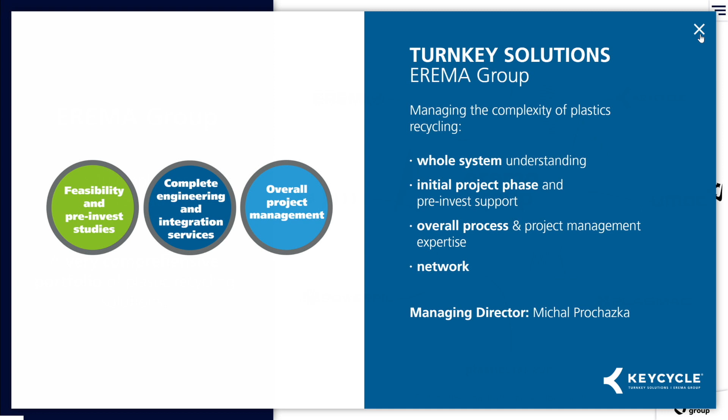Yeah, thank you. Companies like, for instance, KeyCycle. KeyCycle offers turnkey solutions, project engineering for steps ahead of the extrusion part, where you need debaling, washing, shredding. They can do the project engineering, they can do turnkey. Another company which will also be interesting to you is 3S, which is our main production company.

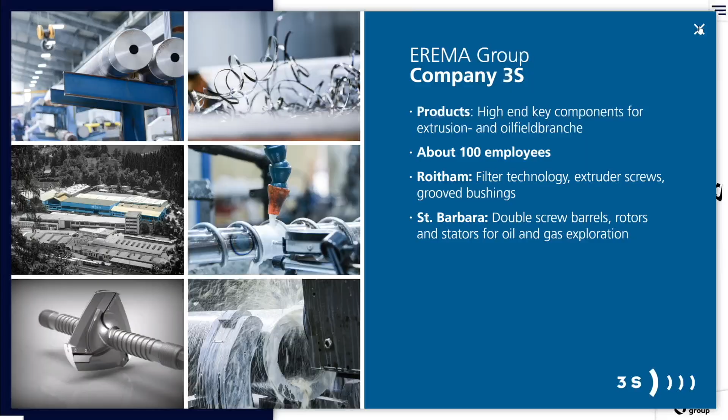So at Erema we do the assembly of the machines, but the steel works, the CNC drilling, this is all done by 3S, and they produce the core parts for the extrusion, the filter systems, the screws, and so on. Thanks, Clarence. Okay. So Erema has grown to a large group.

With this business year we'll have more than 330 million turnover, I guess, and more than 900 employees. We supply around 350 extruders per year now, so on average every day an Erema is started up somewhere in the world. Those numbers are a little bit not up to date; we now have around 8,000 lines worldwide. And we are proud that on our machines around 20 million tons of plastics are recycled every year.

The main market is Europe, because historically they started earlier with recycling. Recycling there is also driven by legislation, as we heard before lunch. Laws are being passed, and initiatives help the market to develop. North America is picking up, also Asia, but also in Africa we've placed quite a few lines, and in South Africa alone we have around 130 machines.

We also have subsidiaries around the world. Usually we work with dealers on all 5 continents, and subsidiaries are mostly in the main markets: China, US, Russia, Bangkok, but also in South Africa. We started up there, so my colleague from Erema Africa is here as well.

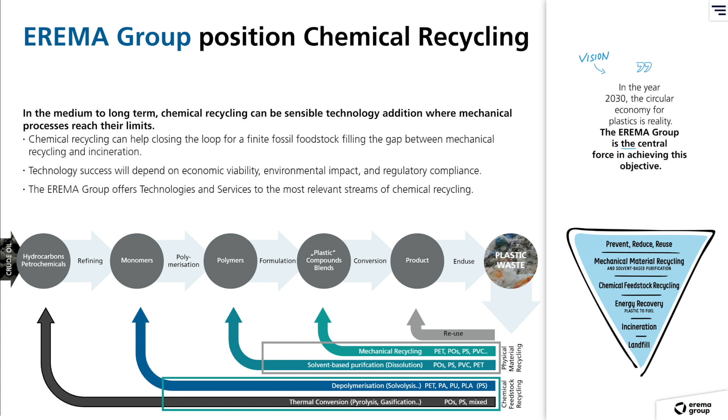Definitely not. And that's why we say, you see it on the right side here, you should follow a certain hierarchy. Of course, try to prevent or reduce plastic pollution, try to reuse as much as you can. Then go into mechanical recycling. If you have streams which are not possible to be recycled mechanically, then you can go into chemical recycling, which of course we do push and want to develop, because what we want to avoid, as you see down below, is, okay, energy recovery, but especially incineration and landfill. And that's the goal for all of us, I think.

So, if you have a look at the complete life cycle of a plastic product, from the product you go down to collecting, sorting. And then every process further on needs shredding, washing. You need to clean the material first. It doesn't matter whether you're going to mechanical recycling or chemical recycling, you need a material preparation, which is pretty much the same.

From shredding, washing, where's my, oh, there we go. From shredding, washing, you can go into mechanical recycling. This is what we do most for the moment. And then you're ready again to convert it. You can go into solvent-based recycling, which would be the second stream, or, for instance, chemical depolymerization. Now, we do participate in such projects, but there's just a few of them. They're still in the startup phase, really.

Solvent-based, we have, for instance, cooperation with another Austrian company, where we mostly concentrate on the way to prepare the material stream, to take out humidity, to flatten it out so to have no peaks. So this is without extrusion. The chemical depolymerization can include the extruding part. I have to be honest, most of those projects, actually all of them, are subject to NDA, non-disclosure agreements. I can't tell you much about it, but still, they are out there. They are pretty promising projects.

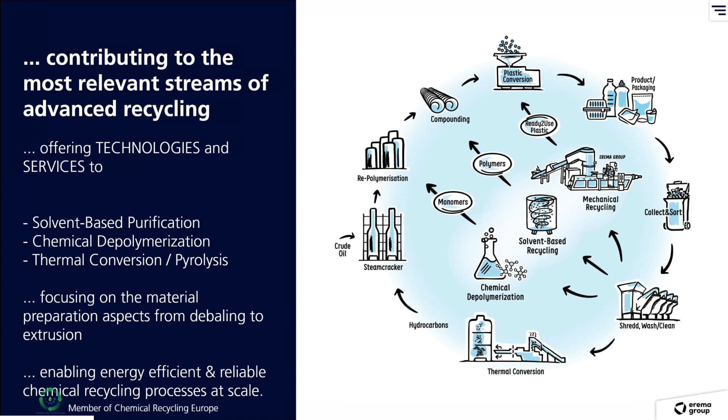What I will be talking about mostly is the latter part here, which is thermal conversion. I would say 80% of our projects within chemical recycling are going into pyrolysis, where you go through the whole chain. So, since you know our view and the possibilities you have, what can Erema offer, especially now for chemical recycling? As you see here, we have the first part, which is preparing the input stream, flattening out, taking out moisture and so on, for the further process, which is, in that case, pyrolysis.

And this is important for every recycler, be it mechanical or chemical. You also need the first part here; it has to be done well. Which is of course collecting, sorting. We were talking about this. We need more volumes, definitely. But we also need good shredding, good cleaning, good washing processes. Even chemical recyclers need to take out PVC. You don't want PVC inside, less than 1%. You have chlorine, you have sulfur, all those things which you don't want later on in a petrochemical process. So they need material preparation as good as it gets, just like mechanical recyclers do.

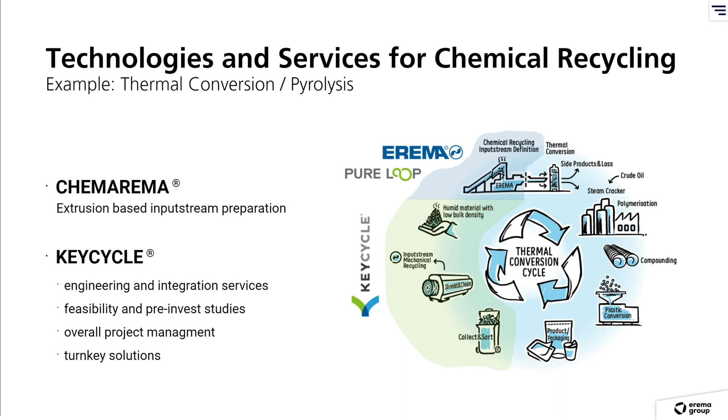And here we offer, let's say, the technologies, the Erema. I will talk about this in more detail. And then we have, again, our company, KeyCycle, who can assist and help out with turnkey, with project engineering. So they can help out with those questions like, how do you sort it, how do you shred it, how do you wash it? How to prepare it for the next step.

All right, so why does it need an extruder at all for chemical recycling? I've talked to people and many are like, chemical recycling, hey, just take the waste as it is and put it in somewhere and then dissolve it and that's it. Well, unfortunately not. It's not like this. It's not that easy. You need, as I said, you need to prepare the material first.

You need shredding, washing, and even that is not enough because, as you see here also, after you get, let's say, the material, be it from the truck, mostly you get it in bales, of course. But you see here, in the animation, that this stuff, after it's being washed and shredded, it's still rather fluffy. So you have high volumes, almost no weight.

So of course, one possibility would be you feed it in directly into the reactor, cold feeding. But after all, you need some steps. You have to solve some problems. I mean, you will have some issues because you want your waste to be oxygen free. You want to heat it up quickly, to make it scalable. So the problems we see here, if you do a cold feeding into the reactor directly.

So first thing would be, what do you do with the fluffy waste? So you need to somehow compact it first. Then you want it oxygen free. You don't want later in your process the whole thing to blow up. So you need to take out oxygen. You could, with a lot of effort, do even that. Add some inert gas, nitrogen, for instance. But then again, it's a matter of costs and effort and energy.

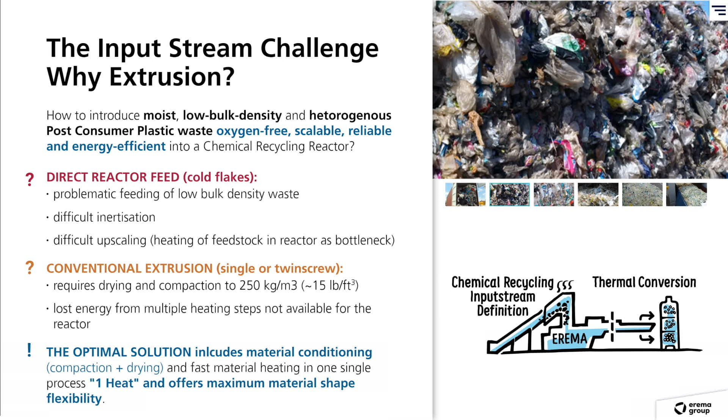So here, as you see in the bottom part, the optimal solution really would be to use the preconditioning unit where we heat up the material quickly, then put it into the extruder with our countercurrent system and solve all those problems with humidity, with different material streams, all in one step. So what does it look like?

So this is the Erema. We call it the Erema principle. This is the preconditioning unit I was talking about. So you see the material coming in. You have the single screw extruder, and we transfer then the hot melt via melt pipe to, in that case, a chemical reactor,

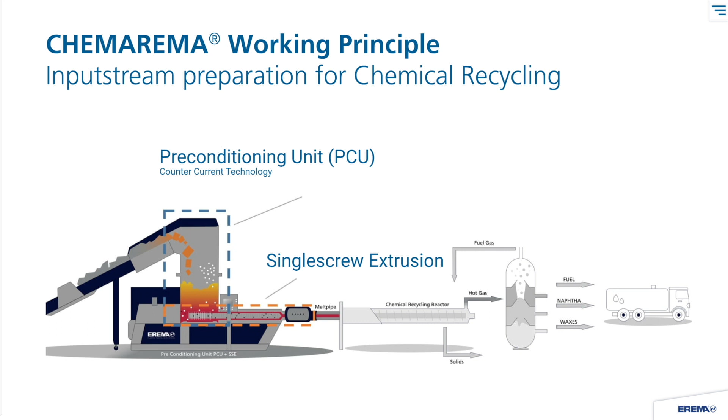a pyrolysis reactor, from which the fuels are then transported into a distillation column, where you fractionize the oils into different streams, like short-chained fuel, naphtha in between, or waxes, which you would then sell to petrochemical refineries, for instance.

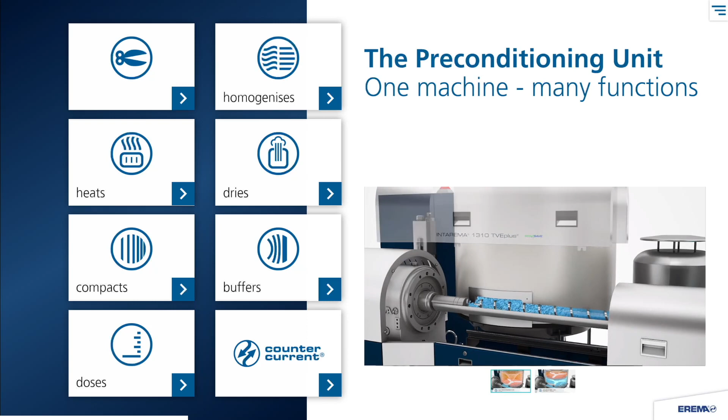So again, what does the heart of our line do, the cutter compactor? It's a disc with knives where the material comes in. Can be rigid material, can be flexible packaging, film material. In case of films, we cut the material down, we homogenize it. There's no hot air inside. Because of friction, we heat it up, then we dry it, of course.

Due to the higher temperature, it starts compacting, and we can use this buffer to add some dosing to it. There are projects where you need additives, you need something to increase reaction time, and that's where you would work with this. And the way we feed it is by what we call the countercurrent principle.

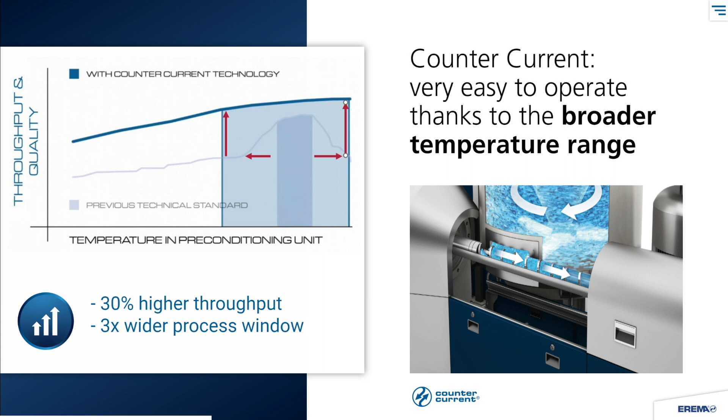So we feed the material against the screw direction, which means that we fill up the screw as much as we can. That's very important because it's a stable process, and as you see on the chart, we have a much broader temperature window. Why is this important for chemical recyclers? Because we can work with a higher temperature within the cutter compactor, which means we feed into the extruder almost at melt phase.

Why is this important again? It's a matter of wear. Because in all those streams, you have a lot of abrasive materials. You have sand, you have stones, whatever. That causes wear on your extruder. But if you heat the material up so much that it almost immediately melts once it enters the extruder, all those abrasive particles start floating in the melt. And that already helps you reduce wear.

If you have a conventional system where you take the material as it is, agglomerate it, put it into a twin screw extruder, until it reaches melt temperature you have a section of the screw where solid particles are rubbing off at your screw tips, your barrels, and so on. So the wear is just immense. So this is also a wear-optimized machine.

So summing it up, this is the basic setup. We have the preconditioning unit, so we can add whatever it is: films, agglomerates, flakes. We are very flexible regarding the input material and bulk weight. We reduce moisture from 8%, we dry it down. We have the countercurrent technology, which is unique, feeding the material against the screw direction and filling it up.

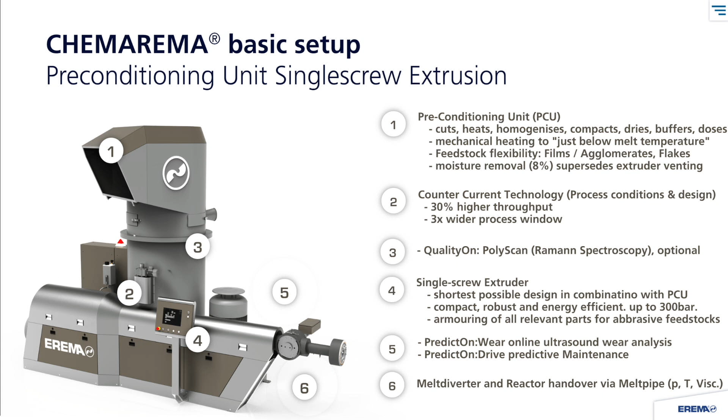We have the single screw extruder and the melt diverter. Here we also help our customers define it. If we know the viscosities and how the material is composed, we can calculate the dimensions and help the customer install the melt pipe the best way, how long it should be, and how the melt diverter should look. So here we also have know-how.

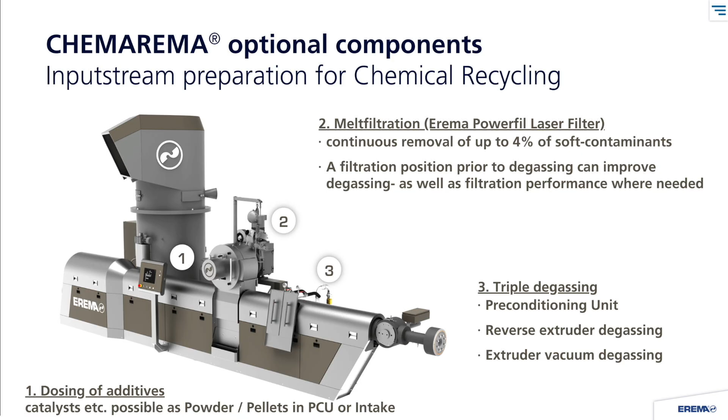What you see here now, I just put it in the slide. This would be, let's say, the perfect solution for mechanical recycling for post-consumer, where you have filtration in the middle and degassing. For chemical recycling, we do not usually offer such machines. However, there are projects where you might need some dosing additionally, where you might need some good degassing. So also this we could offer as part of the scope of supply if it's needed. But in most cases, we have the short screw without filtration.

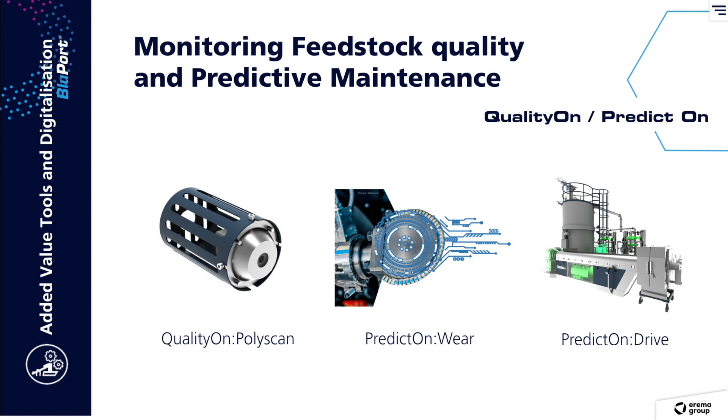So these are the neat devices I already mentioned. So you have, for instance, the QualityOn:Polyscan. What is it about? It's a laser, so it's a Raman spectrometry based on the Raman technology, and basically it detects within the cutter compactor your material composition. Why is this important?

Again, you want to know, do you have a lot of PVC inside? Also, usually chemical recyclers say we need PE, PP, maybe some PS, polystyrol. But then you detect some other things like polyamide, like PET. This is what they don't want in their process, because PET will bring in oxygen, polyamide will bring in nitrogen. And you can detect this.

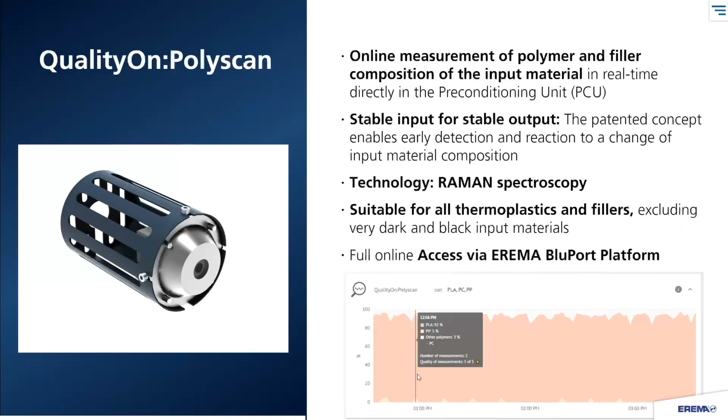Let's say it's maybe not that accurate, because it will give you a trend. And if you have, let's say, issues at your reactor, you can look back and check. Oh, I know why, because at that time I had some additional material streams which I did not want. And you can, of course, take them out via a valve. So this is another device which can help you to reduce problems later on in the process.

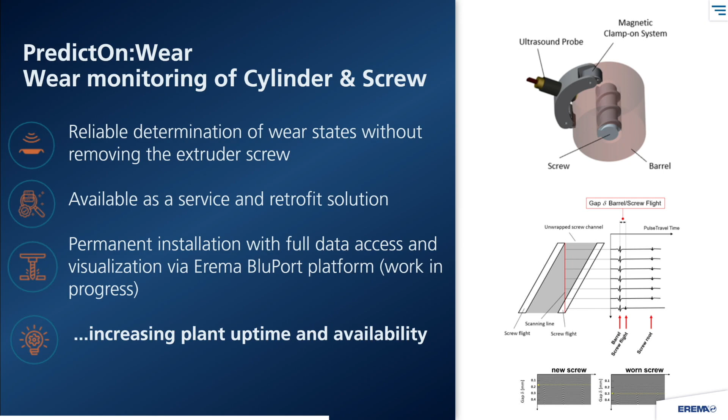Also, we have PredictOn:Wear and PredictOn:Drive. So we are the first company, I guess, in our industry who introduced predictive maintenance, let's call it. So what you see here, this ultrasound going through, and basically by sending the ultrasound and detecting how long it needs to come back, you can make some conclusions on the wear, how good it works, how bad it works. And on the drives, we have special state-of-the-art sensors which help us to detect if something already starts to break down.

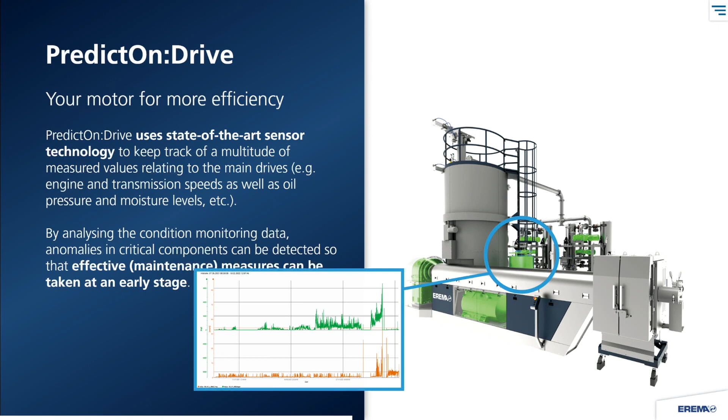Imagine if you could know that your gear is already not working optimally. In that case, for instance, if you see it down here, we saw it by the vibrations. We saw that way before. You don't see the time scale here, but it was 6 months before the gear actually broke down.

Why am I telling you this? Why is this important for mechanical recyclers, of course, but especially for chemical recyclers who have huge amounts? You don't want standstill. You want uptime. So if you see that, then you can order the gear and have it on stock. And once it really breaks down, you can change it immediately.

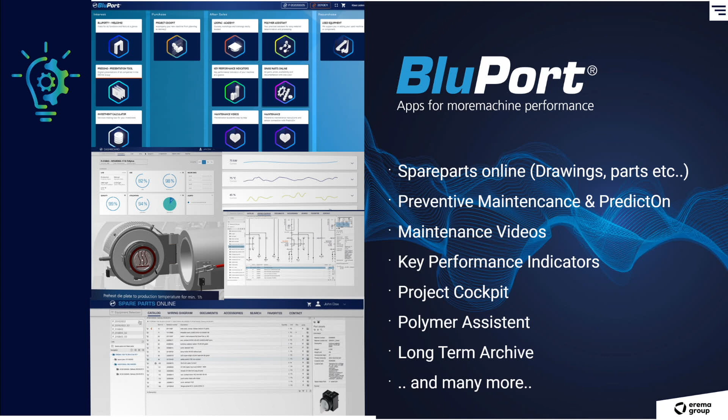And all those devices you can display via our BluPort. This is our digital platform. And on the digital platform, you will see we have some other applications, some apps there. You can put it on your phone. You see the machine running, all the values.

We have like a dashboard, so you see if it's running, how much throughput you have, if it's working well. You see on PredictOn:Drive if you have some issues. We have maintenance videos. We have all the layouts. So every customer who buys a machine, of course, gets access to that platform.

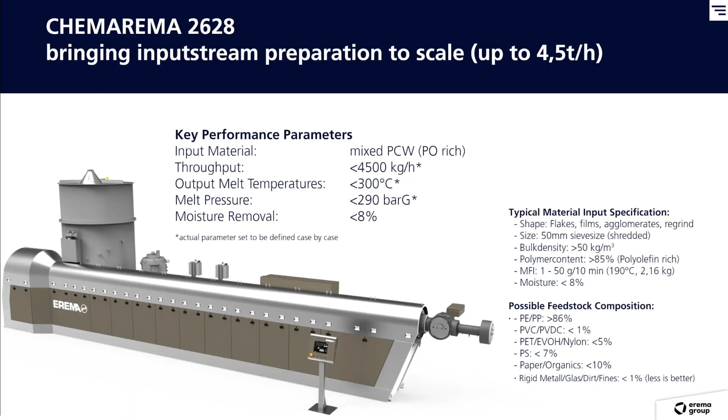And here's a typical example of the latest projects we have. Below you will see a typical specification by our customers. It's PE/PP. And what you see, we built single screw extruders now. We can do up to 4.5 tons, actually even 5 tons. 300 degrees, 290 bar. The pressure is not actually needed for pyrolysis, for chemical recycling. Depends.

There are some projects which do need a high pressure. Others do not need it. However, just imagine you have a melt pipe and you have to transport the melt maybe 10, 20, 25 meters. Then you still need pressure to transport the melt. Again, a twin screw extruder couldn't do that. They would need a melt pump in between to increase pressure.

And regarding chemical recycling, we've so far sold 24 machines, so realized already 24 projects. Most of those who are already up and running are small machines, pilot machines. I mean, we're talking about 500 kg, 800, 1000 kg. That's nothing compared to what's coming up now.

So the real projects which are coming up now, I mean, the pilot projects are pretty much also based in the very same countries. We have in Japan, in Canada, UK, California, but also now really big projects coming up. Japan and Korea, which is the same technology regarding the pyrolysis. England, US. US, it's 6 machines times 3.5 tons, so that will make more than 20 tons per hour of output for that project, for instance.

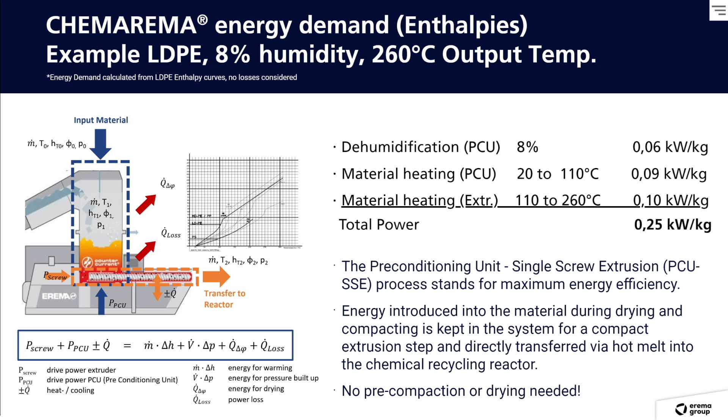All right, to sum it up a little bit, here's another slide where I just wanted to show you why we have such a low specific energy consumption, because again, we need a little bit to dry the material, then we heat it up, as you can see here, and then the energy here is not lost because the material is fed into the extruder immediately. So the extruder starts again from, in that case, 110 degrees for that material, and melts and heats it up to 260 or 280, 300, whatever you need. So there's no loss in energy.

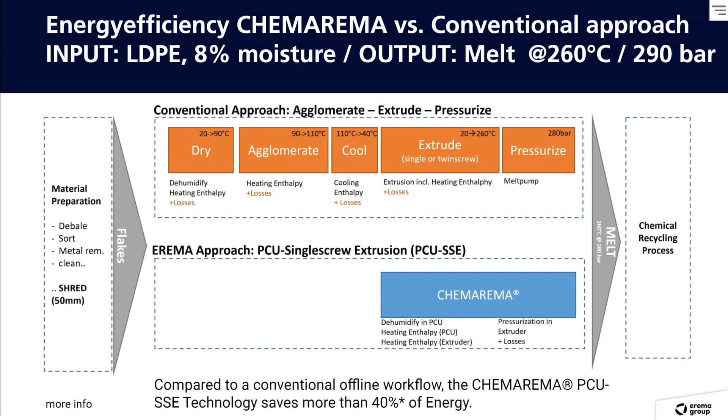And if you compare again the processes with the regular, let's say this is the Erema, and these are the regular steps: we have fluffy material, we dry it, we create agglomerates, and then we put them into a standard twin screw or single screw extruder. But again, you lose quite a lot of energy because the agglomerate has to cool down. It can't ignite itself if you leave it like this. So you have to cool it down, and then again, you heat it up in the extruder, have all the problems with abrasive material inside, which then starts to cause high wear as well.

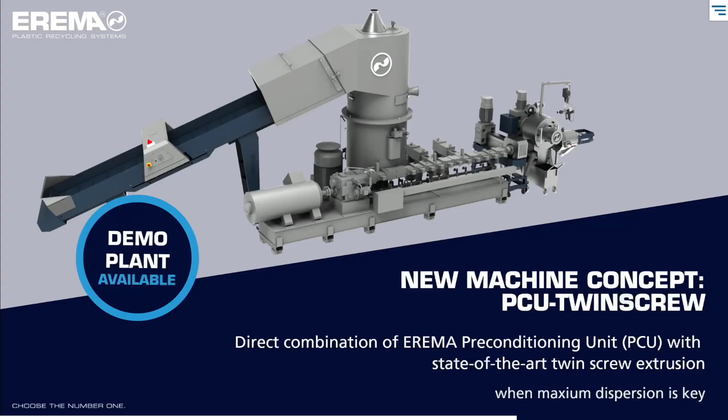So why am I showing this? We have made conclusions. We have made comparisons, and Erema, I guess, is the one company that has and masters both technologies. We have single screw, we have twin screw, we have this new machine concept, which was not designed for chemical recycling, with a preconditioning unit, as you saw it, and a twin screw, tangentially aligned. So it's like a toolbox. So basically the message I want to tell you is we are a one-stop shop.

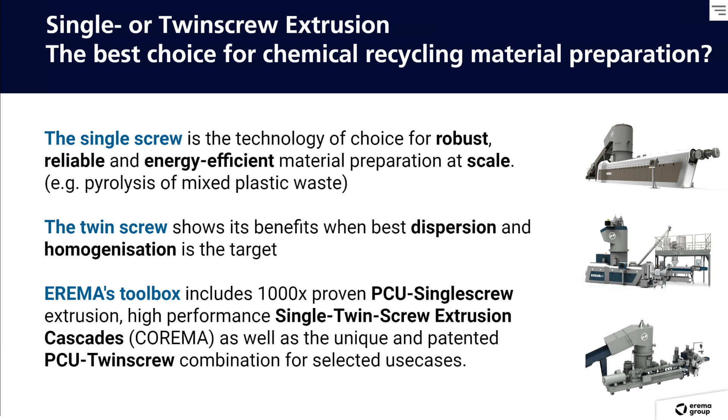But we made comparisons, we know what we're talking about, and we think that for chemical recycling, the single screw technology will be the technology of choice because it's more robust, it's reliable. Like I said, single screw has less issues with wear. The twin screw can also be used. For instance, with PET, where homogenization or dispersion is a target, where you have some reactive additives and you need to homogenize them as well as you can. Then of course maybe a twin screw would be an option here. So as you can see, we have a lot of solutions which are possible and which we offer.

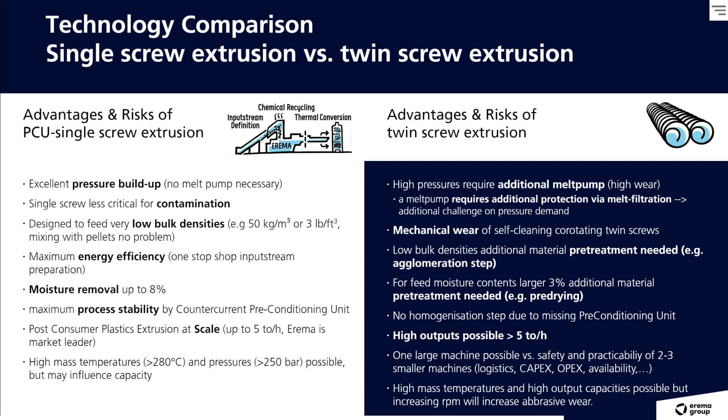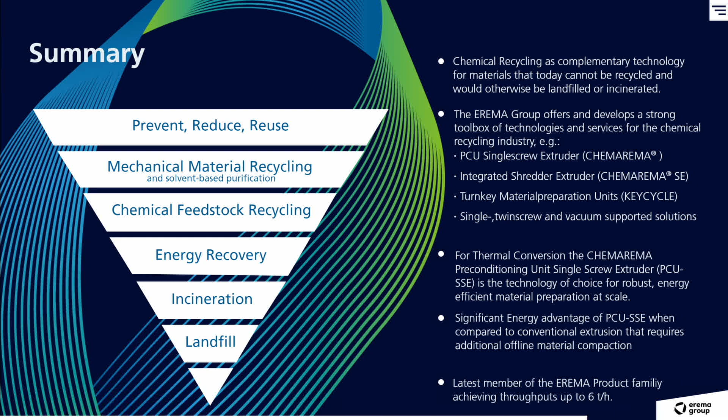Here's again the comparison. You will have it also in the presentation in the handout. But coming back to basically the beginning, if we can, we should do this: prevent, reduce, reuse. We know that a lot of streams cannot be reduced or reused. Okay, so we go into mechanical recycling, then chemical, what I was talking about now. But again, we want to avoid incineration and landfill. And that's the message, basically, that I want to give you.